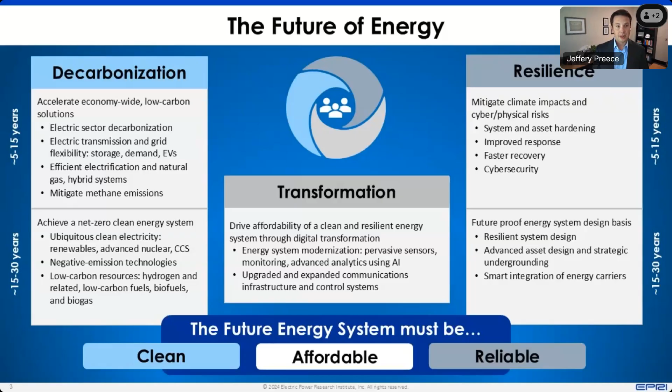But the bottom line for the future of energy is it has to be clean, it has to be affordable, and it has to be reliable. And those will be common themes throughout the presentation today.

When we approach the pathways towards a decarbonized future, we love to talk about new technologies and the excitement and the potential that they bring. But we're really building on and need to continue to invest in some of the technologies and approaches we already have at our availability. Energy efficiency needs to be at the forefront of all we do. Not using that electron, not using that molecule is the best way to reduce our carbon footprint and provide meaningful progress towards decarbonization.

We have to continue working towards an efficient deployment of clean electricity and the electrification of industries where that makes sense, and really focus on the hard parts of our economy where low carbon fuels, carbon management through capture and storage play a role in getting us to that final decarbonized future. And of course, it doesn't stop once we get to 2050, 2060, whatever the goal might be for the country, the region, or the company, 2030 in some cases. It's a continuation beyond. It's one mile marker that we're working towards. But that energy system being developed has to maintain affordability and reliability well past the decades of achieving those targets.

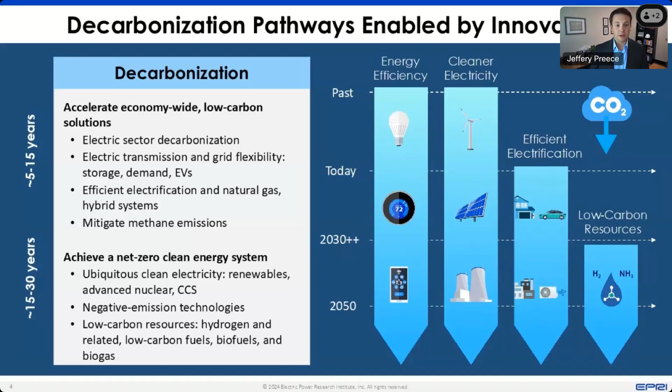As I mentioned, we started this initiative with our partners GTI Energy back in the 2020 timeframe. At the time, only about 10% of the global greenhouse gas emissions were covered in various national targets. And what that means—some of them law, policy, some pledged, some proposed. Fast forward to this summer, June of this year, almost 90% of the greenhouse gas emissions are now covered. And you can see the breakdown of how they're solidified based on these national targets.

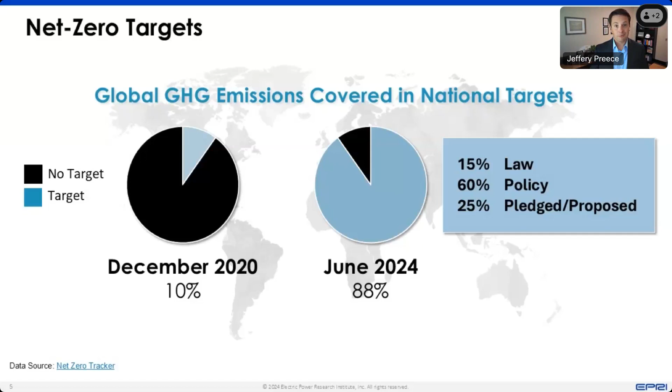So in just 4 short years, we've seen a tremendous amount of attention being paid to setting these targets, and now, of course, figuring out how we're going to get there. EPRI's approach—this is an older report, it goes back to the foundation of this initiative—looks at economy-wide emissions. This is only for the US, though it could certainly be representative of many other countries around the world.

But the US story paints a picture to compare to, and that is there's a strong role of electrification. 20, 30 years ago, electricity was 2% of our energy source. Today it's about 20%. In the future, 2050, if not a little before, it could be as much as 50% of energy that we all use as energy consumers from electricity. And when we look at the role the electric sector plays, it has a strong ability to get the entire energy economy closer to net zero, but we can't get there through electrification alone.

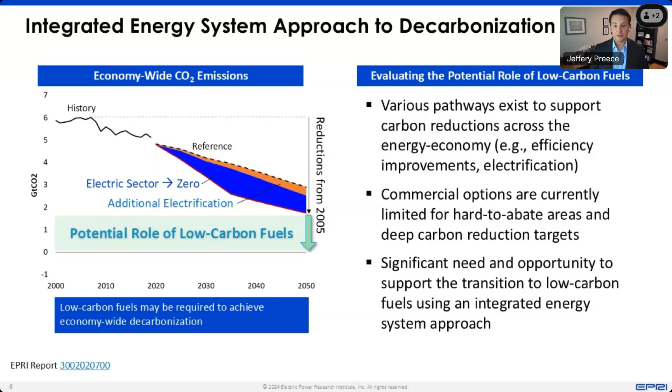And so that's where low carbon fuels, carbon management, and other technologies and approaches come into play. That is really the focus of this initiative that we launched a couple of years ago. What's been really interesting—this is a somewhat anecdotal take on what's happened in conversations around net zero.

First, it becomes defining what is net zero. What is zero? Are we going for 100% renewables? Are we going for zero carbon? Is it renewables plus nuclear? Is it any technology, as long as any carbon put in the air is mitigated through other means? There's a number of questions and approaches. We're seeing less and less of that question, but it's still very relevant as organizations and countries decide where to align on net zero.

Then the conversation shifts to: what is the status of these technologies? How are we mitigating CO2 from point source emissions or pulling it out of the air? Where do hydrogen, ammonia, or e-fuels come into play, and what does it take to get them deployed? We have existing assets, and we're building a lot of new assets with the same technologies—gas turbines, engines, boilers—across industries, not just power. Can those assets use low carbon fuels in the future, or can they be retrofitted? And how do we prove that?

And then it comes to, well, how much is this going to cost, and how are we going to get these fuels? How can we know they'll come into our facility reliably and affordably, and what infrastructure is required? Then—are we the only ones asking this question? Are there others around us geographically where we might share resources, because it took 100 years to get fossil fuels to where they are in terms of availability, infrastructure, delivery and storage, and we're talking about changing parts of our energy system in about 30 years. So if we partner together, are there opportunities?

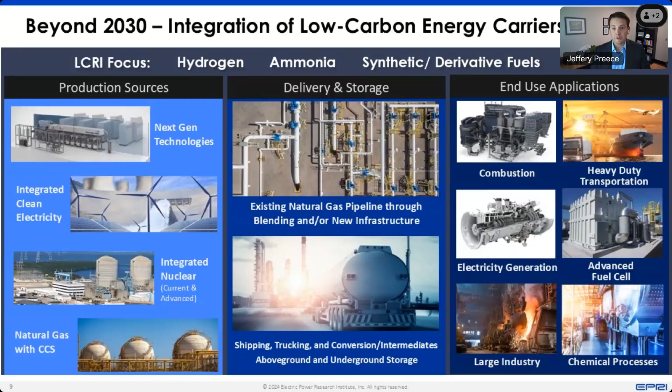So we use this perspective as we think about where and how these molecules and energy carriers play a role. But of course, everything is changing quite rapidly. And thinking about this at a systems level also requires critical thinking and rethinking as new information comes to light.

One of the first major outcomes of the initiative I'll point you to is our US economy-wide net zero scenario analysis. There's a link here, it's publicly available. If you haven't seen it, I encourage you to check it out and give us feedback on it. As I'll say at the end, we're updating this analysis, which was done in 2022, so be on the lookout for that.

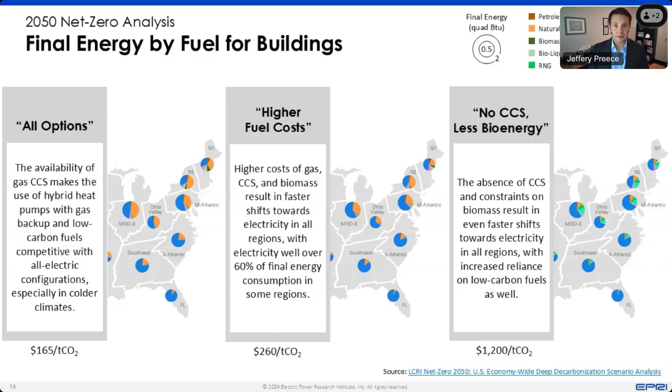Now, these are not meant to predict the future. These models are wrong. They're filled with a lot of assumptions. They're not going to say what it is in the next 5, 10, 15, let alone 30 years. But they give us good insights into understanding the intricacies and the balance of our energy system in a way that really hasn't been studied in full degree and still needs a lot of work.

And we're happy to be collaborating with ESIG and others on these very same questions. So that's the 2050. But then, we start this initiative in 2020. And of course, now we're living in a very different world.

So net zero was the big focus. Now let me go through some intermission, if you will, about what's happening in today's environment and how that's changing. We say we're reaching this inflection point where that transition we used to say in the 2020s is now becoming a transformation because of three main factors.

We're seeing an unprecedented amount of demand increase on the electric sector. We're seeing the supply of electricity and energy changing rapidly. And we're seeing the impacts of weather today, where maybe we didn't see them for decades or anticipate them for decades to come.

So, of course, a lot of buzz and a lot of interest in artificial intelligence and data center growth. You start data centers and digitalization's been around. First wave, social media, cat videos, Facebook, liking posts, Instagram, all that's happening. Second wave, everything is moving to the cloud. A lot of our infrastructure, resources, backup storage, management of systems going to the cloud.

And now we're entering this third wave of artificial intelligence, with growth projections of 2 to 15+%. It's anybody's guess at this point. But what we think about in terms of artificial intelligence: retinal scans in airports to identify passengers, screening for boarding passes, based on cloud software and AI, that's one thing. But also there is a race to essentially create the human brain.

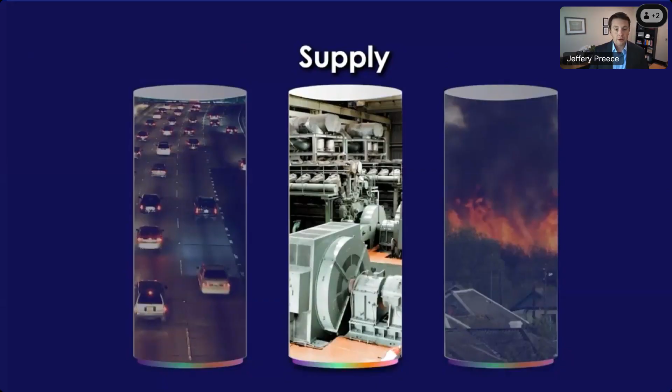The second area is on supply. We're obviously seeing a lot of growth in renewables. We're seeing a steady growth in gas. We're seeing a lot of that gas offsetting retirement in coal. But as I mentioned, the regional aspect of this is very important.

So here's a snapshot, June 18th of this year, from MISO, SPP, CAISO, ISO New England, and ERCOT. And no surprise, everybody's different. Everybody has a different resource mix. Everybody has a different generation profile. Maybe there's some commonalities in terms of capacity across different lines. Certainly there's trading going on across many of these parts.

But how can we talk about an energy system when the electric grid, the supply, is already diverse, already changing, and will continue to change quite rapidly over the next few years?

And we somewhat anticipate that as we see this change happening, more renewables, less coal, maybe steady output of nuclear, potentially some bump ups if advanced reactors come online in the next couple decades. But one of the important parts that we're seeing is we have events occurring within this energy transformation already happening to the grid. So 3 examples on the right.

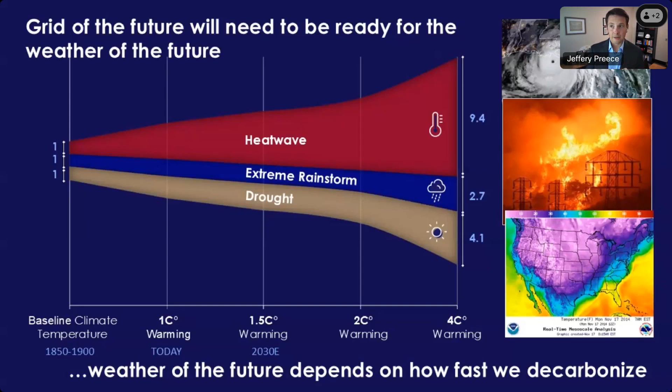So taken together, there's a lot of things already happening to our energy system in our transition, let alone this target to get to a net zero future. And we at EPRI and many others have largely maintained this perspective that technology and solution optionality is the way to get to an affordable and reliable net zero future.

And that optionality is not just within the type of generation sources we have, where our energy comes from. It's also in how we manage and design our grids, how we expand and use technology like grid enhancing technologies and resources, advanced demand response, energy efficiency, customer interactions, markets, regulatory policy. All of these options need to be on the table. And they have to be part of this ecosystem that goes into designing and supporting this energy transformation.

The initiative subject to this talk, though, is really focused on the technical pieces, but I really want to highlight where we go with technology deployment has a role in a broader and bigger ecosystem.

So we've got net zero targets. We have unprecedented load growth happening in the electric sector. We have a rapidly changing resource supply on the electricity side. We have our energy system being impacted by weather and climate effects, and that's expected to continue. We have less than 30 years to get to a mid-century net zero target.

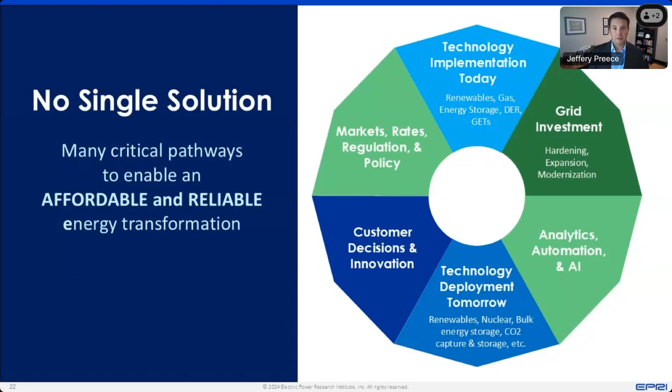And the other challenge is it takes time to develop these technologies. The good thing is the energy system has been very successful taking technologies from concept to full commercialization. As I mentioned in the beginning, and Charlie did in his intro, our position within this initiative is to figure out how we can accelerate certain parts of technology and the integration to really try and shorten these timeframes.

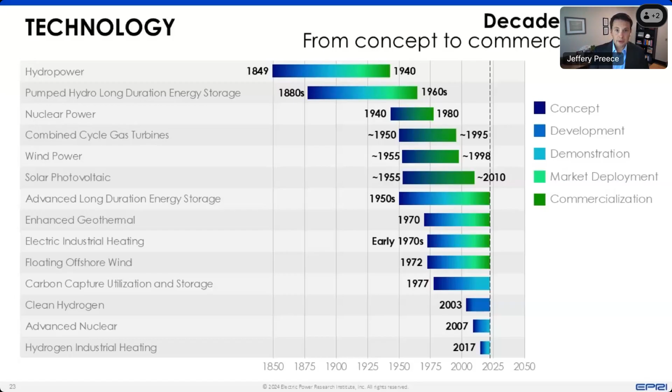Because the timeframe we have set for ourselves is already shortened by the standards we can measure from the past few decades. The other challenge with this, but really it's an opportunity, is that while decarbonization options vary by industry, there's a lot of common themes that if we integrate and have a holistic vision and look at this at a systems level, talk to stakeholders to educate and understand the roles of these technologies, no industry has to do this alone.

And certainly there's certain parts like energy efficiency and electrification and demand response around our energy, not just electricity, that are going to help along the way. But the challenge of getting to net zero, of deploying these technologies rapidly, needs to be one that isn't done in silos with every industry going on their own. And so being very clear about what makes sense and maybe doesn't make sense from industries is one of the first steps that can be taken.

You've probably seen a lot of news around hype cycles and the booms and busts of hydrogen as one of these low carbon fuels, and that's going to happen. We don't think that that's an issue. We see technologies and approaches come and go, but as long as society and the industries are learning from those cycles, we tend—and we have a history to show—that there will be progress in these technologies and their deployments. The key, and the hard part, is maintaining this transformation with that reliability and affordability in mind.

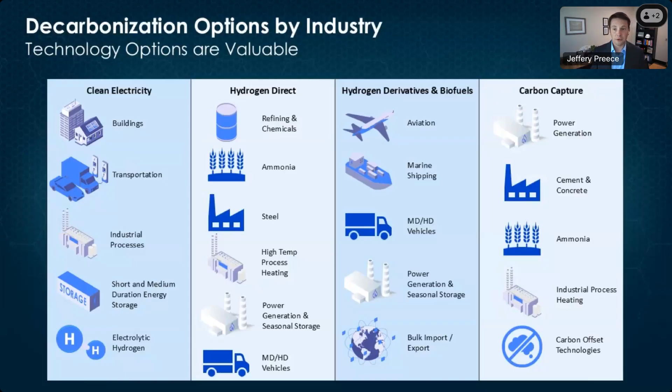So, what does it mean to be integrated? Again, I mentioned integrated, I showed you the slide deck, but it's not just integrating the technologies.

That's one part. It's not just integrating the infrastructure. That's another critical role that doesn't get a lot of talking points and coverage, in my opinion. We need more talk on infrastructure. There's a lot of talk on energy security.

That's certainly increasing, especially in the race to AI. But there's a lot of potential in the economics and the job space, in the coordinated policies when we think about low carbon fuels and CO2 management. And these topics on the right are really the values that come out of this integrated approach if we can stack them and design for them going forward.

So, of course, we're trying to maximize emissions reductions, but which industries, which sectors have to take that on first? Well, the economists will argue that there's an economic pathway if you study these systems, an industry, steel mill next to semiconductor manufacturing with power plants and residential and commercial uses. You can design an economic transition for that cluster of organizations, companies, individual consumers, and maximize the emissions reductions according to an economic route of decarbonization.

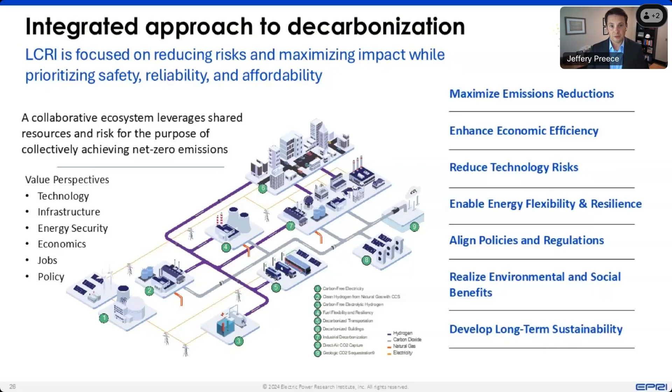In doing that, it can help you manage the risks, align against flexibility and policies and environmental, and get that sustainability. But that in and of itself is a challenge, and coupling sectors is not a new phenomenon. We see that worldwide, as regions have developed industrial clusters and hubs, if you will. But how and where that's done becomes a critical portion of this energy transition. And just making sure people are aware and they're talking about it in this way is really important.

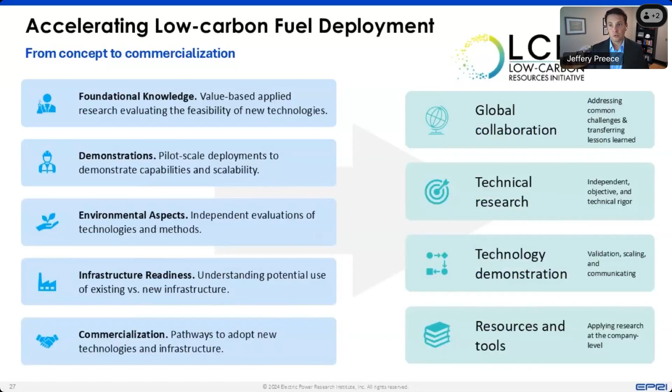Okay, so more about LCRI. We're really focused on taking these concepts and getting them to deploy. That is our number one target. And we've set out to create a global collaboration. We have more than 60 organizations participating from around the world, focused on applied technical research and knowledge sharing, leading towards demonstrations and providing resources and tools that can be used going forward.

So we started in 2020. We built the foundation. What are low carbon fuels? What are energy carriers? What are net zero targets? What does it look like for a country like the US to make this transition, the all options, the limited options? What technologies have gaps, and where can our initiative between the efforts of EPRI and GTI Energy and our members help accelerate this transition?

So now we're at a cross point with this initiative where we've done a lot of work already. Encourage you to go to our website, find information. There's a lot of publicly available resources there, and really trying to work towards getting technologies in the field, and not just one-off technology, showing how they integrate. All of this is about integration with the electric side, with the gas side, electrons, molecules. It all has to come together.

And so a couple of examples of what that looks like. Hydrogen gets a lot of talk. It's been around, it's had hype cycles. Really, we have to figure out, where does hydrogen make sense? It's going to make sense only in certain regions and certain applications. And how do you get the regional engagement to understand its value, understand its gaps in a productive way? And then what are the technologies that need to be advanced in order to move forward?

And because this is a presentation with ESIG, I want to share with you one of the learnings that we've pulled looking at integrated resource plans on the electric side related to hydrogen and modeling. And you can see 4 buckets where most of the IRPs filed don't mention hydrogen yet. These are IRPs, so they're looking out in a relatively short time frame. But we're seeing more and more starting to have awareness, some incorporating modeling, and very few actually making assumptions in there. And why is that?

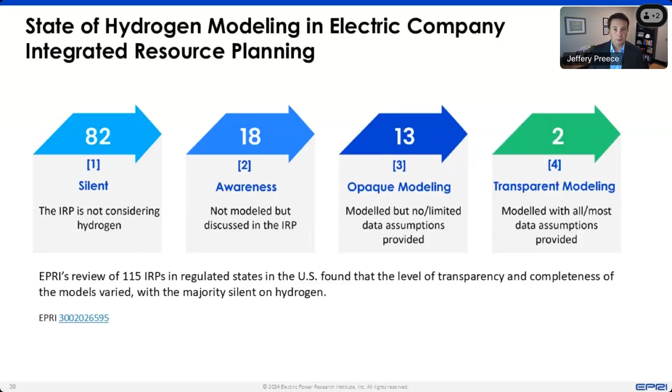Well, obviously it's complicated. An IRP on the electric side doesn't always address the fuels component of hydrogen on a market dynamic. But we've developed resources to help organizations understand and plan for and educate their stakeholders on what this could look like. So a couple of resources here. These are all publicly available. Please check them out. Give us feedback.

The first one, we look at hydrogen with renewables. We have a techno-economic calculator that allows you to generate a levelized cost of hydrogen based on our own independent evaluations of cost for different technologies, and gives you a range of capital, operating, and sizing that you can use to then go put into a system planning model.

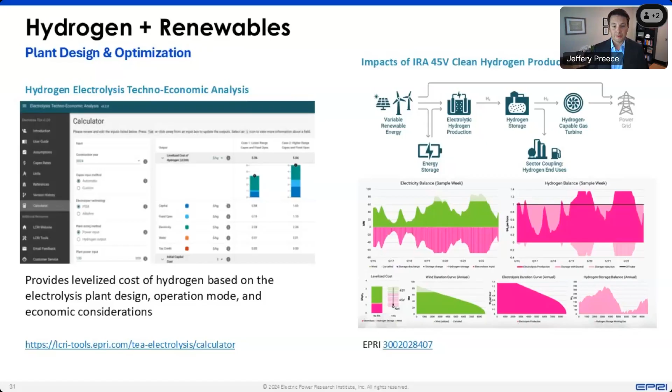So getting resources into the hands of stakeholders, that knowledge capture, that understanding of technologies and what it's going to take to deploy these technologies moving forward, is very critical.

And then we look at maybe some other areas that aren't as obvious on the surface, looking specifically at what the Inflation Reduction Act and the Bipartisan Infrastructure Law are having on this transition. This is a great example of the integration of not only the gas network, but CO2 management, ethanol production, hydrogen, and methane—all the work.

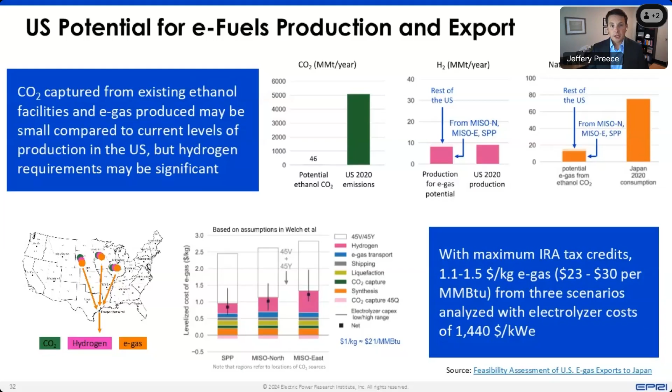Another example, equally important to the integration, is the people. Under this initiative, we have the ability to lead the U.S. Department of Energy's only hydrogen workforce development program, and we're more than happy to extend this to others. So if you have a workforce need or a workforce opportunity with universities, let us know. There are also a lot of really great resources at your disposal through this effort, looking at how hydrogen could help transform the energy economy, but also some of the fundamentals around safety, environmental aspects, and hydrogen use cases. We appreciate the funding support and the partnership with the U.S. Department of Energy on this endeavor and many others as well.

The other thing I mentioned was demonstration. So far, the initiative I presented has focused on understanding what net zero is, building those resources, and the capabilities of low carbon fuels like hydrogen, carbon management, and biofuels. But really, we're working towards getting things in the field, testing them out in an integrated way. So a couple of examples to build off of.

The first one here, we're working with NREL, the National Renewable Energy Lab outside of Denver, to operate a just over 1 megawatt electrolyzer system, and working with them to develop system characteristics of what it looks like to match renewable energy electrons—solar, wind primarily—with hydrogen production, and how to integrate at a site level with those operations. What will that do not only to the electrolyzer operation but to the grid, because perhaps there are ancillary services or grid response mechanisms? Integrating at a very large scale is something that hasn't been done in many places in the world.

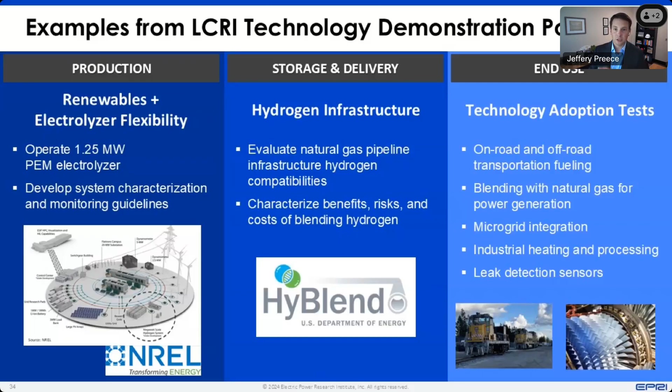So our end use portfolio is really focused on educating, getting data objectively and independently, and studying this again, not only at a technology level, but at an integration level. So I'm going to give you some examples, sticking with power generation, but we do a lot in industry, mobility, and other parts, but I'll just highlight power generation.

So for natural gas, there's a few options being considered in this journey to net zero. You can retrofit and use a new fuel or energy source. You can repower your existing asset, or you could bring in a completely new asset.

And within those options, you have more choices: do you do a drop-in fuel like a biofuel? Do you start blending low carbon fuels, hydrogen percentages, ammonia perhaps? Then do you go to point source capture, putting carbon capture on the emission side of that power generation asset? And then, the most complex, switching completely to 100% low carbon fuel.

And of course, that's not the only factor, because with natural gas, the full life cycle has to be considered. Some parts of the world don't have a reliable supply of natural gas. Some countries heavily import it, some states can't access new infrastructure for natural gas supply, already limited, plus public perception, costs, etcetera. There's a lot that goes into this, so it's not very simple.

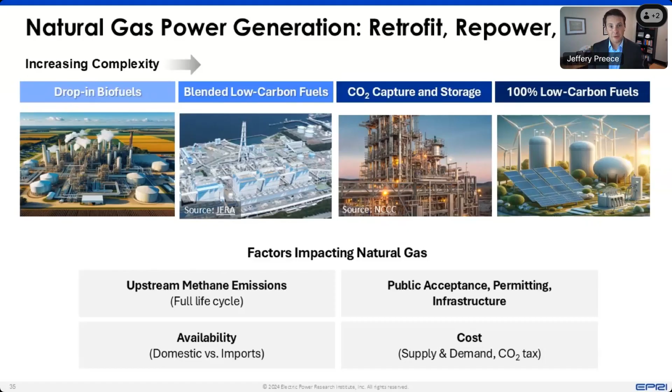But when we look at this, we're trying to understand where and how, again with the timeframe, net zero 2050 is a target, but the transition is also important to this.

So what doesn't get a lot of attention right now, more broadly in this space, are the opportunities with low carbon fuels, renewable fuels, biofuels. There's a lot of characteristics that go into this. I'm being a little vague on purpose.

But within this portfolio, we're helping to evaluate the supply chains, again the logistics, the infrastructure. Some of these are meant to be drop-in, but they haven't been proven to be drop-in. So we anticipate that when you combust a biofuel with similar properties, similar carbon-hydrogen links in the chain as a fuel, it's going to give you the same performance on the back end.

And then, of course, that life cycle has to match up in a way that meets the net zero targets. And then, how do you use that fuel long term?

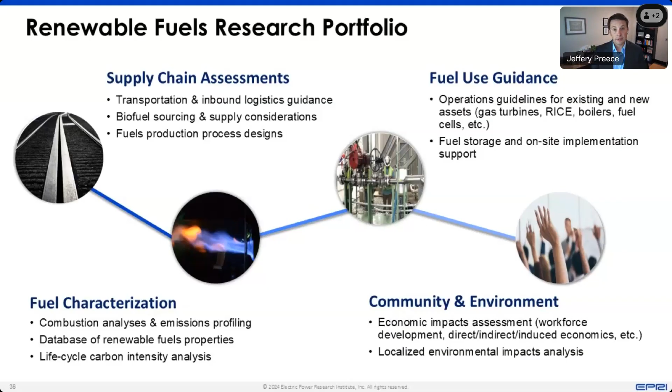And then, these fuel sources are different. And with that difference comes opportunities to engage the community, opportunities to improve local air quality, in addition to greenhouse gas emissions reductions. We're seeing a lot more interest and investment on the community side to understand the impacts, especially with existing assets. Because if you can keep a power plant where it is in a county, city, or town, and transition the fuel to be low carbon, that brings benefits to that community, in addition to the environmental side.

So we have a number of resources. Again, I'm putting these out there so that you'll check them out and give us feedback. We have a database that maps the potential sources of renewable fuels in the US, the Renewable Fuels Atlas. And then we have a fact sheet out there that goes through the different types of fuels that are part of this transition, in addition to the work we're doing evaluating the role these fuels play or could play.

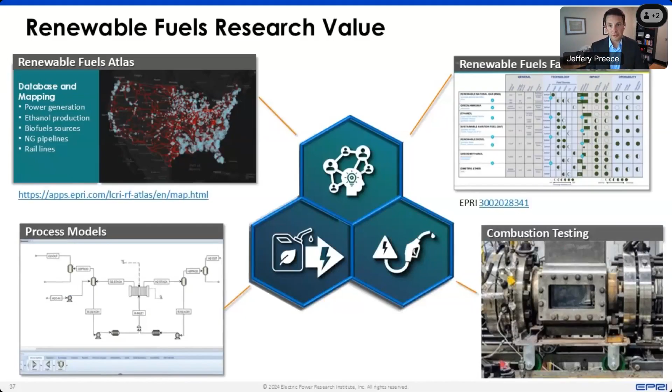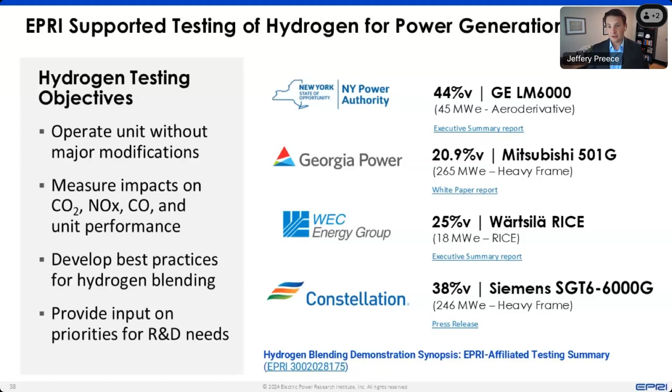And of course, there's a lot of questions around, well, is this viable? You're talking about making electricity, making hydrogen, and turning back to electricity. That sounds like there's a lot of energy loss, and there is. This isn't something that happens consistently, electron to electron. It's a long-term energy storage play, and maybe specifically if you're sitting on top of a large salt cavern to store that fuel and have excess renewables nearby. But nonetheless, it's too early to tell in some cases.

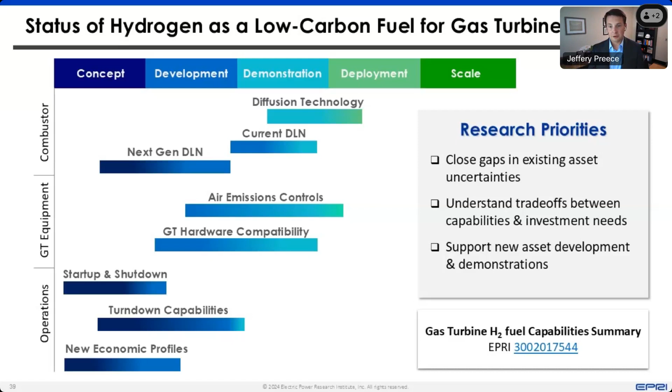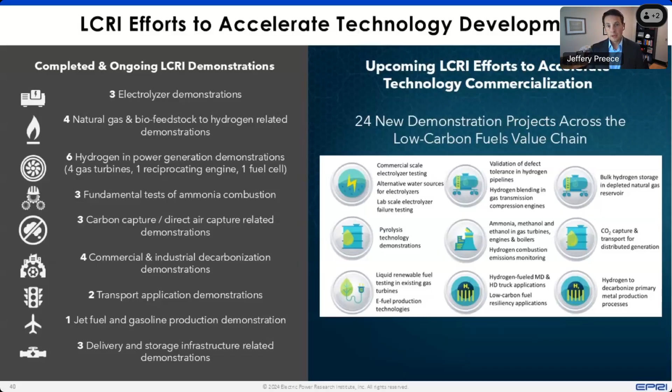And then in addition to that, what we're really excited about is the efforts that DOE and others worldwide, not just in the US, are launching around these hubs. There's hydrogen hub that gets a lot of attention. There's carbon management hubs going on. There's industrial decarbonization, but we're leading an effort in addition that looks at how to integrate that knowledge sharing again.

You see in the news all the time projects being canceled. Hydrogen just didn't work out. Biofuels that didn't work out. CO2 pipelines coming into question. This is a natural part of the transformation. This is technology coming to terms with the scale at which it has to commercialize, with public acceptance and understanding. And hubs provide a very unique opportunity to get all stakeholders working together.

And through this initiative with the LCRI, we're engaging with all of the hydrogen hubs, but two in particular we have very strong engagement with that are working towards - they're moving forward. You can find information there. Really speaking to the reality that there is a lot going on in this space. There will be bumps along the way. We're going to try very hard to lend our objective and independent analysis to focusing on the areas that are going to make the biggest impact right away.

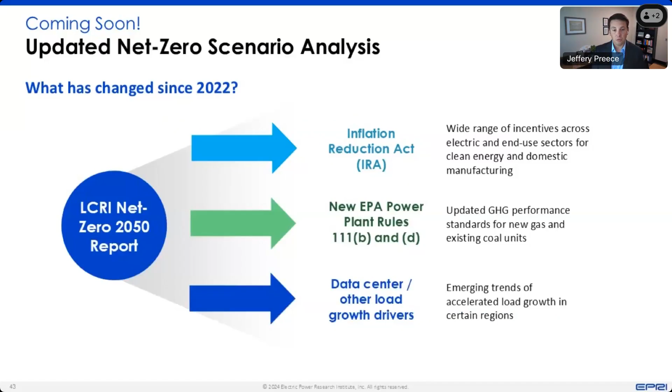And then lastly, I'll leave you with a little teaser. We've got a new net zero analysis coming out. And I've mentioned all these topics already with the exception of the middle one, which is the new EPA power plant rules for the US and what that could do for power generation and net zero.

But what I'll end on, and certainly it's probably recognized by now, the pace of change we're talking about is intensifying. And so we have recharacterized this initiative since we started looking at net zero to address that pace of change. We recognize we're not the only ones out there, and we really value these types of opportunities because we hope they will increase the amount of communication and coordination that we can create across the energy system. So Charlie, with that, I'll turn it over to you.

Jeffery, that's quite a nice tour through what's going on in the world out there in the decarbonization side of things. So before we jump into the Slido questions, I have a question that kind of was following my trail through the presentation here on economics. I'm curious, has there been enough work done that you can get a feel for what the economics of some of these pathways look like? Are there some pathways that just fundamentally look more attractive than others because of fundamental limitations or economic limitations?

It's a really interesting question. So I would say what we learned in doing our first net zero analysis was the economic pathway and the human factor don't always align.